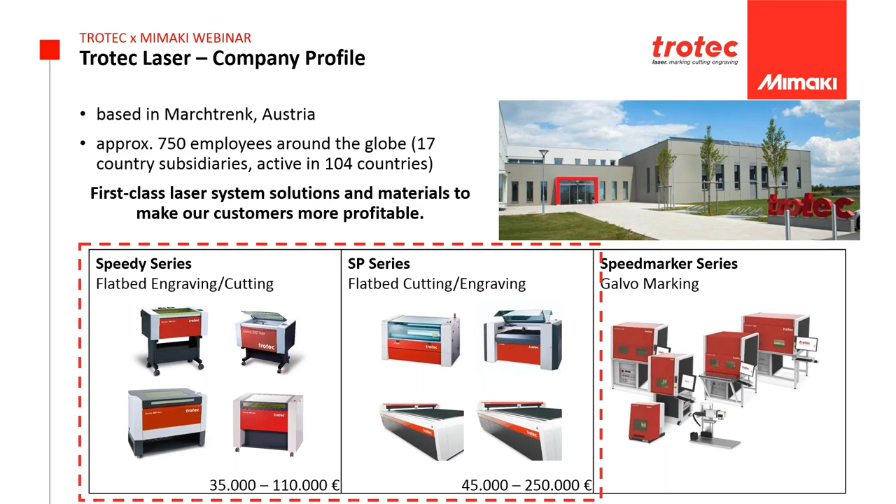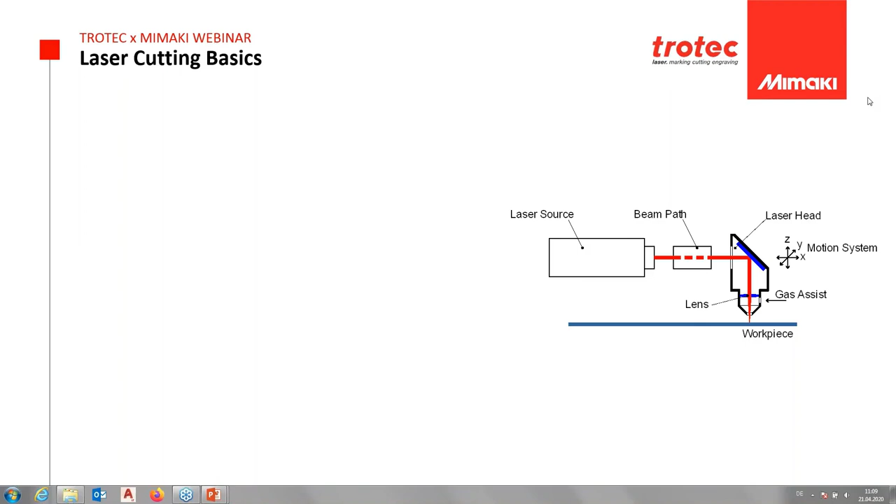What is laser cutting and how does this work? I want to give you a short introduction. It all begins with a laser source. This laser source generates a laser beam. We typically use infrared light, so the laser beam is not visible for the applications that we have in mind right now. The power range is about 30 to 400 watts, so we have a wide range of available power, depending on your material thickness and your productivity needs.

The beam path is a set of mirrors and lenses that delivers the laser beam to the cutting head. Then there's a motion system that moves the cutting head across the workpiece in X, Y, and Z direction. Then there's, of course, a lens that focuses the laser beam on the workpiece surface to make sure that you get really high energy density there. And at the workpiece, the laser beam energy lets the material sublimate. What does sublimate mean? It changes from the solid state immediately to gas state. So it's not melting, but it's immediately converted into gas.

What are the properties of laser cutting? It creates a very thin kerf. So the cutting gap, the tool, is very thin, in the order of 0.1 to 0.2 millimeters. It's contact free, so there's no force on the workpiece, and it directly converts from solid to gas. So if you extract the gas, you have a very clean process.

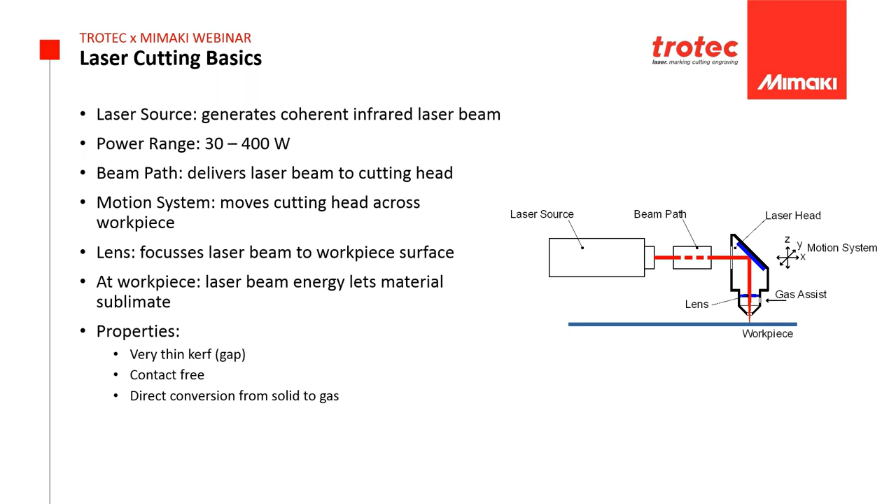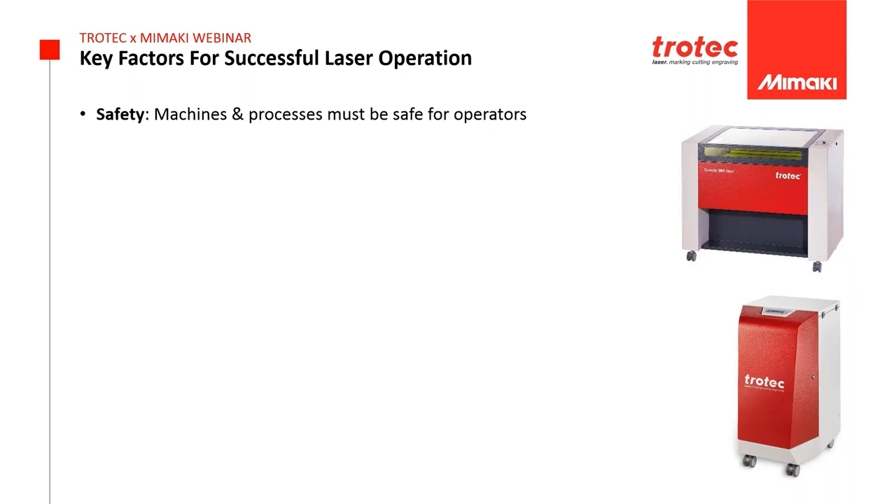There are some key success factors for laser operation. First of all, the machines have to be safe. This should be obvious, but the restrictions and guidance from both the EU and insurance companies is getting stricter, to make sure that the machines are safe and that the exhaust gas is treated properly. This makes a big difference between laser machine manufacturers, and we take a lot of care to make safe and clean machines.

The process technology: every process, every material needs its correct parameters. You have a few parameters like power, speed, or the addition of process gas, where you can influence the desired results. You can always do a trade-off between throughput and quality, depending on your actual needs for a certain workpiece.

The exhaust system is a key feature in a laser system. It's underestimated many times, but it's of high importance to have a reliable operation, and you have to make sure to have a good exhaust system in place. We do offer exhaust systems that complement all of our laser machines.

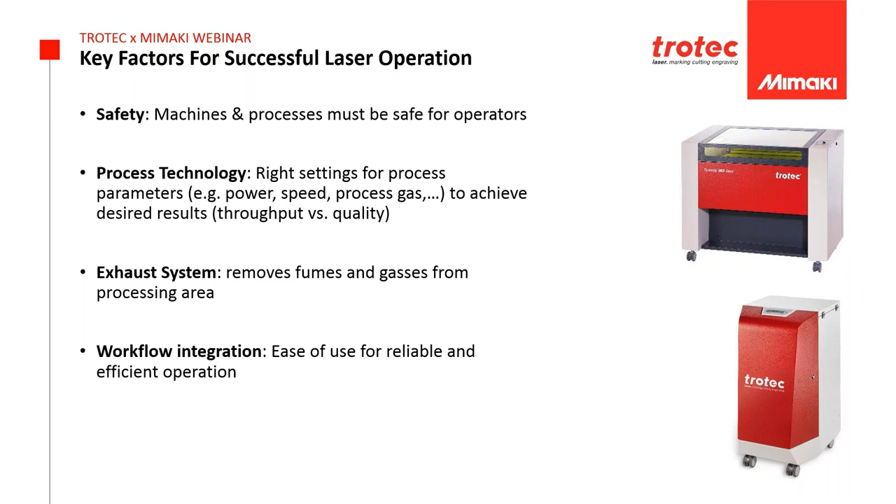Last but not least, it's important to have a simple workflow, to handle workflows easily, to follow through the steps of a workflow easily. I think the Mimaki Trotec integration is an excellent example of such an integration. You will see this later in this presentation, in this video, how this is integrated.

So with all that said, what are the benefits of laser cutting? Basically, it allows you to have more freedom in your designs and gives you more possibilities to design products. You start with your well-known possibilities of digital printing. You have graphics, colors, and lots of possibilities regarding your artwork.

Laser cutting, laser finishing adds the degree of freedom of shape, which means that you get out of your rectangle and have arbitrary shapes, and you can use structure, meaning that you can combine things, you can have different work materials, and you can structure your object, your workpiece in a more flexible way.

I'll address the two additional parameters right now. What does adding shapes mean? It lets you break out of rectangles and squares. The creativity regarding shapes is endless, and you can really create exceptional designs.

The integration of graphics and shape together gives you just so much more possibilities to tell the story and to provide convincing products. And it's fully digital, so as printing is, you can both create the print and shapes in a completely personalized way.

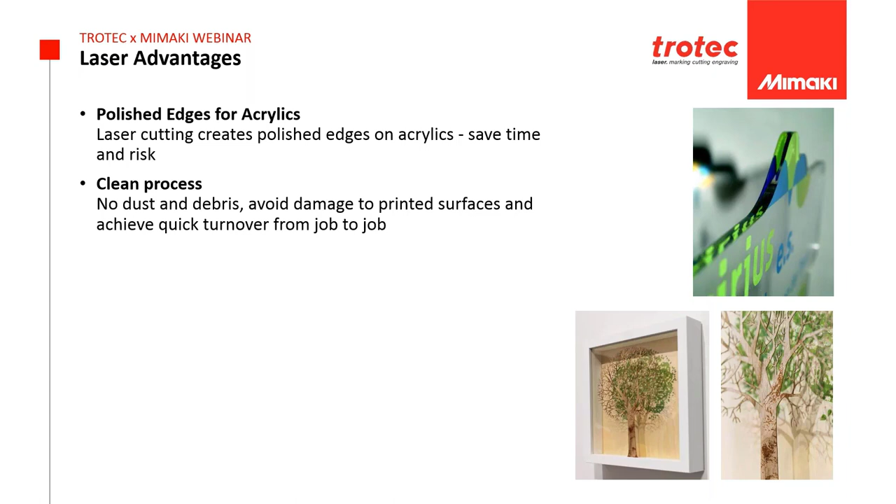It's a clean process, so there's no dust and debris. Your printed surfaces are not damaged by scratches, and you can quickly turn over from job to job because you don't have to clean the machine in a painstaking way.

You can create very fine details, very sharp corners, small structures. We have this tree example here shown, so very, very delicate structures are possible, and the shapes are not limited by your production technology.

And the fourth advantage, it is gentle to your print. If you cut printed objects, there's no stress on the print, there's no vibration of the workpiece because it's contactless, and so your print remains clean and is not destroyed.

The question of materials, is it universally applicable? It's applicable for a wide range of materials. Acrylics is a very prominent material for print and cut applications. Other plastic materials such as ABS, polyethylene, polypropylene, twin wall or hexagon graphic sheet for signage applications, all kinds of foil materials, self-adhesive, are well suited. Wood-based material such as MDF, plywood, veneer, or solid wood, as we will see in our example later on. Wood fiber-based graphics boards, something that's very eco-friendly, recyclable, and hard to process with other cutting technologies.

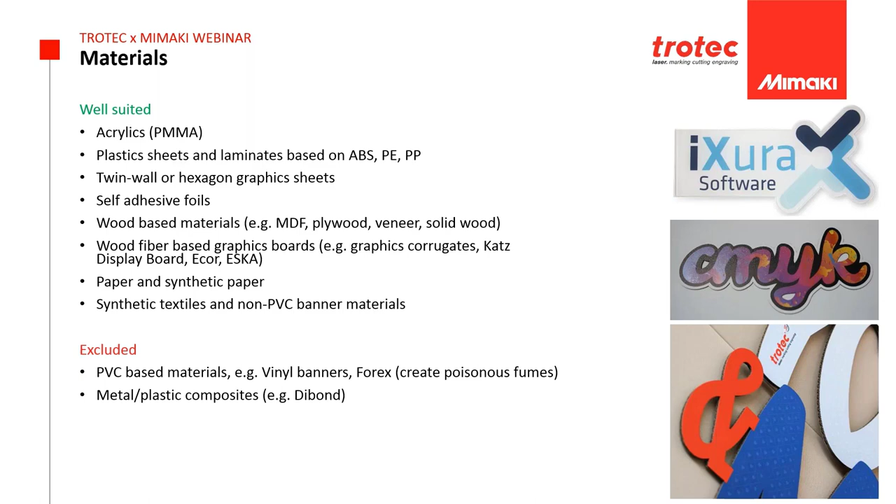There are different brands out there, they give excellent results with laser cutting. Paper and synthetic paper is also an option, and synthetic textiles and non-PVC banner materials. Speaking of non-PVC, excluded materials are PVC-based materials because they create poisonous fumes. Unfortunately, that's not possible to cut with a laser. And metal plastic composites such as dibond, they cause headaches as well.

So which product from Mimaki and Trotec would you combine? The first combination we would like to highlight is the Mimaki UJF 7151 Plus with the Trotec Speedy 360.

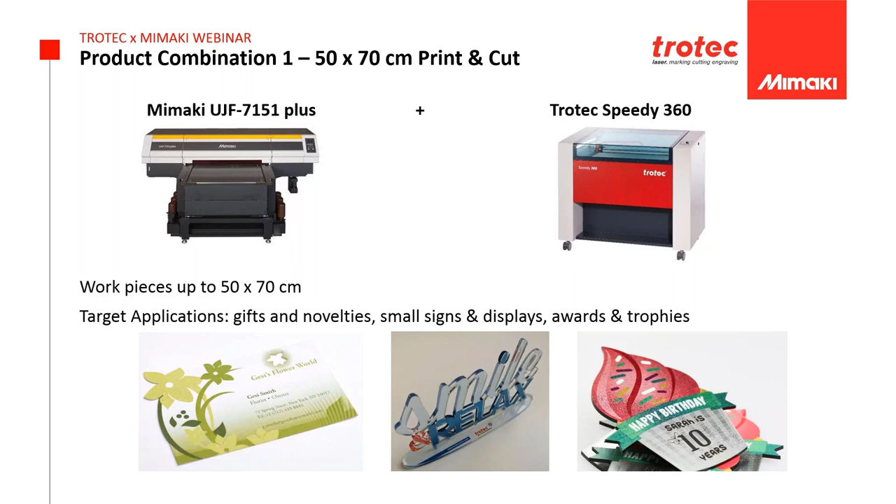This is also demonstrated in the video afterwards. It gives you the possibility to work on workpieces up to 50 by 70 centimeters. Typical target applications are gifts and novelties, small signs and displays, awards and trophies. Sample images are shown below. This is really a nice combination, you will see it in action later in the video.

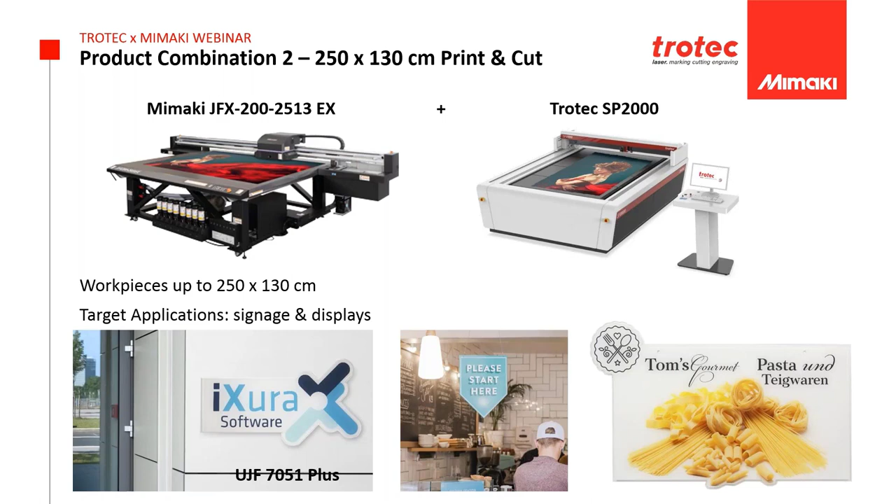If you need larger workpieces up to 250 by 130 centimeters, you can use the Mimaki JFX 200 2513 together with the Trotec SP 2000. The workpiece size is then 250 by 130 centimeters. Typical applications are indoor and outdoor signs and displays of attractive sizes already.

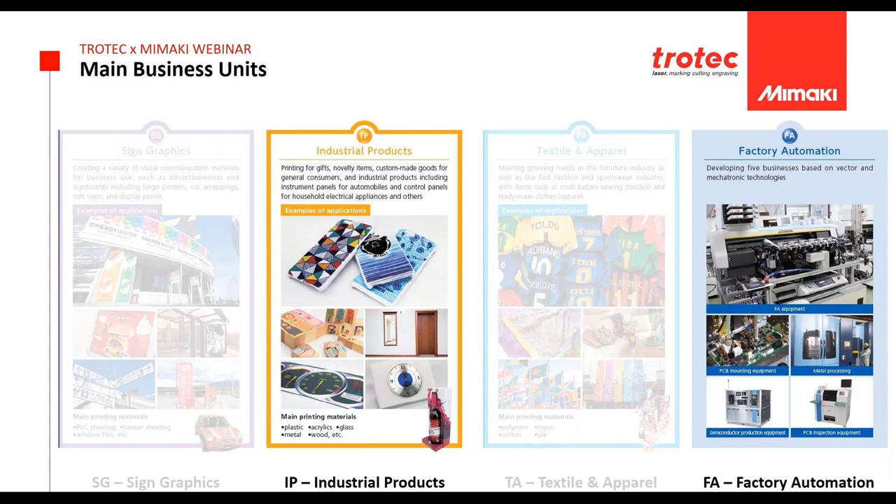For this webinar, I want to focus on the industrial products with the flatbed printers and workflow where this connects with factory automation. So let's have a look at our printers first, our lineup.

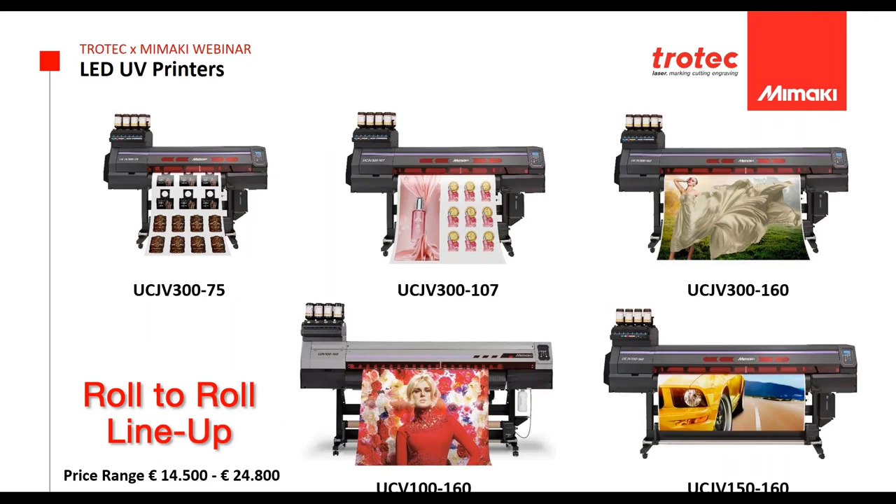First I want to show you the roll-to-roll. This is all LED UV printing. We have different sizes, different possibilities, cutting integrated or just printing without cutting, where you combine with Trotec. The price range here is just below 15 up to just below 25,000, depending on the size and speed. Each machine also has its different options.

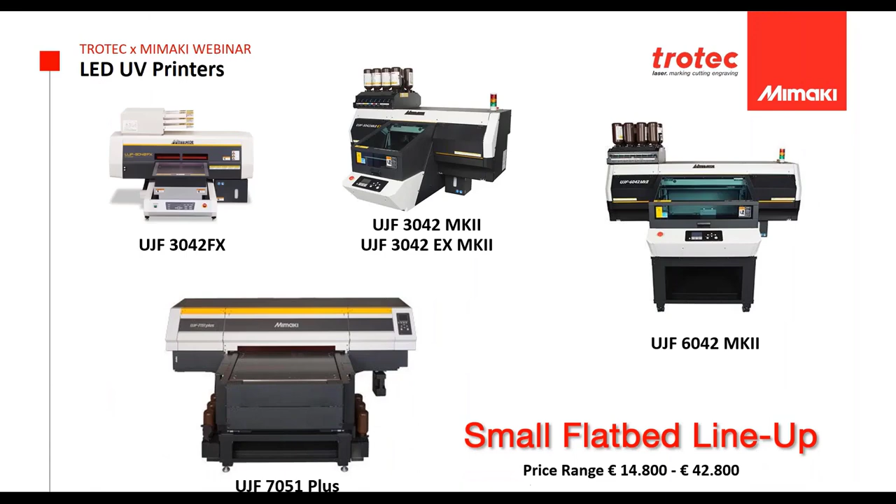The next one is the LED UV flatbed, the small lineup. We have our UJF 3042, where 3042 stands for the table size, so 30 by 42 centimeters. Then we have the following up from the FX, which is much faster - it's the MK2 version, and even the EX model, where we added an extra head for more productivity. Then we have an A2 size model, the 6042, 60 by 42 centimeters.

And the last one, as Michael also showed, the 7051 Plus. This is our most industrial product in this price range, with the highest quality and productivity in the market today, even with a silver metallic ink as the only one in the market. The price range is just below 15,000 to start with the FX, up to just below 43,000 for the 7051 Plus.

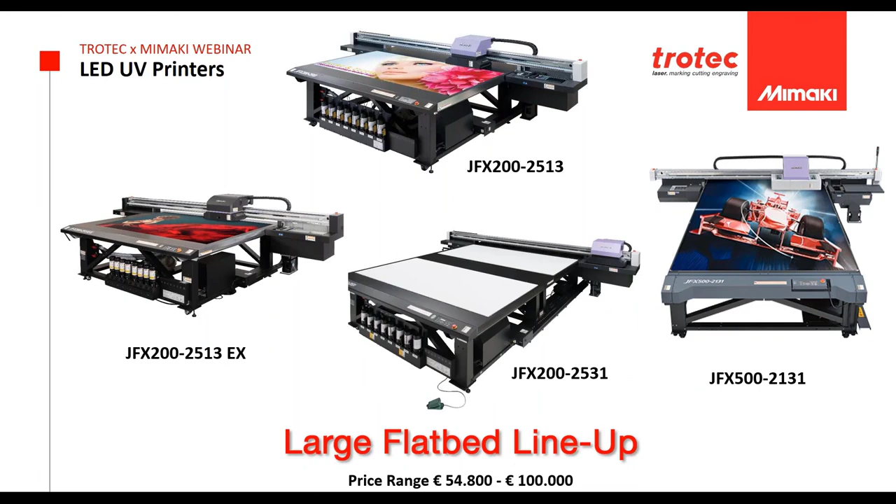The last one is the large flatbed lineup. We have 4 models. As Mimaki, we were the first to introduce LED UV light in flatbed printing, and we started with the JFX series. Now when you look at the lineup from left to right, we have...

...the 2513EX, our JFX 200 model, the latest model. Then we have the JFX 200 2513, where 2 meter 50 by 130 is the size. We have the 2531, with an extended table, where you can do production like a ping pong table - first the first half, then you switch and prepare the next part. That is 2 meter 50 by 3 meter 10. And the last one is our JFX 500, 210 by 310.

When we look at the price range here, it's just below 55,000 up to 100,000 euro. Nowadays, with this whole situation and these virtual weeks we are organizing, already for the 5th week in a row, I believe, we have some special pricing for you for basically all our printers. So if you are interested, please check out our website or contact your local Mimaki dealer.

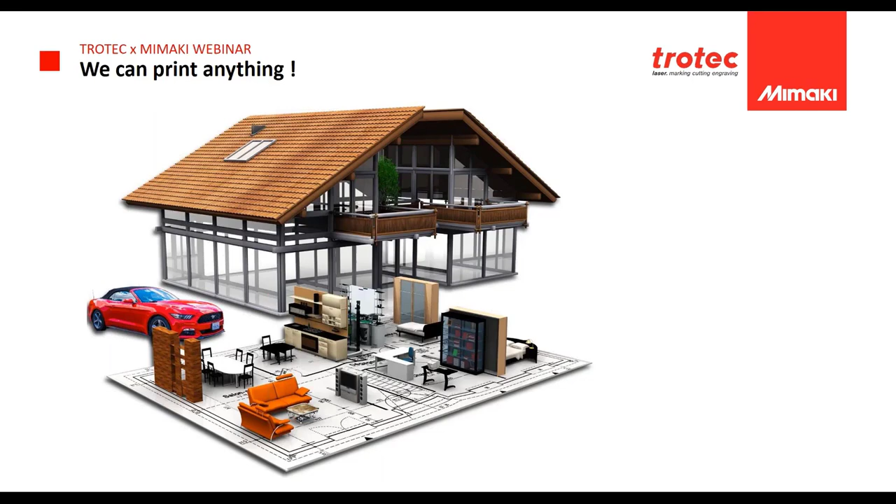So at the end, I want to come to the conclusion that with LED UV printing, basically we can print on anything. When it's flat and rigid, we can print on it. All the examples that Michael showed you what to cut, we can also print on. So if you look around, this is an example of a house, you see so many products that can be or are printed with LED UV technology.

From a dashboard, from your car, to cornflakes packaging, textile even - we can print textile, and Trotec also has a textile cutting machine. You see the table where we have wooden printing, circuit boards. So all around you, you see examples of what can be printed with LED UV.

So it's a big opportunity to have both of these machines in your company, and it gives you a lot of opportunity to print whatever you want or whatever is passing by.

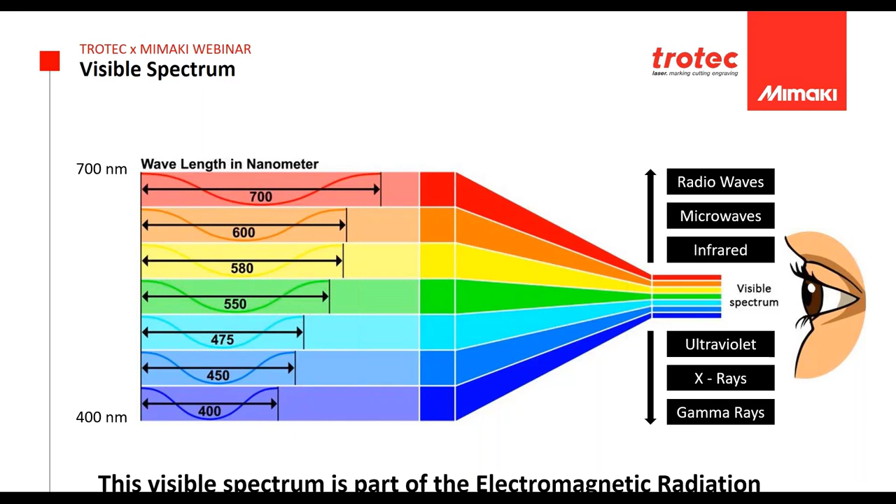To make it a little more clear, in the middle we have the visible light I was talking about, then on the right side you have the ultraviolet light - this is what we use to cure our inks with our printing technology. On the other side we have infrared, and this is the light that laser is using - Trotec is using infrared technology in their systems.

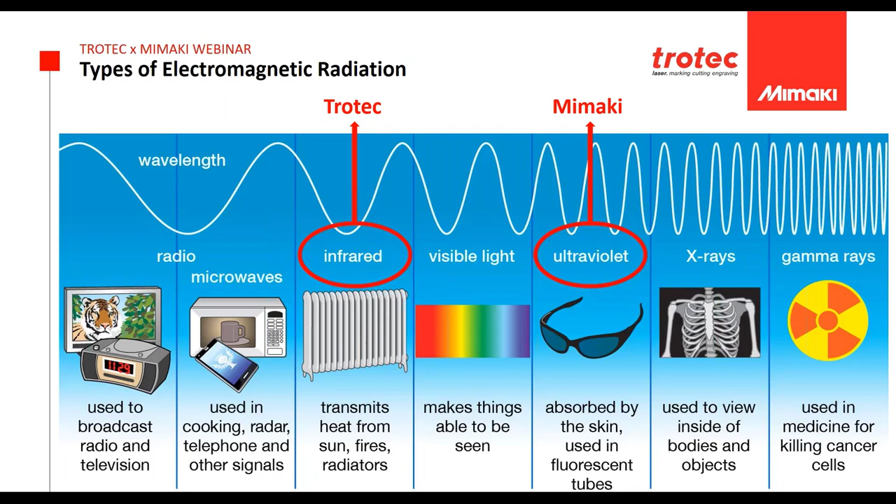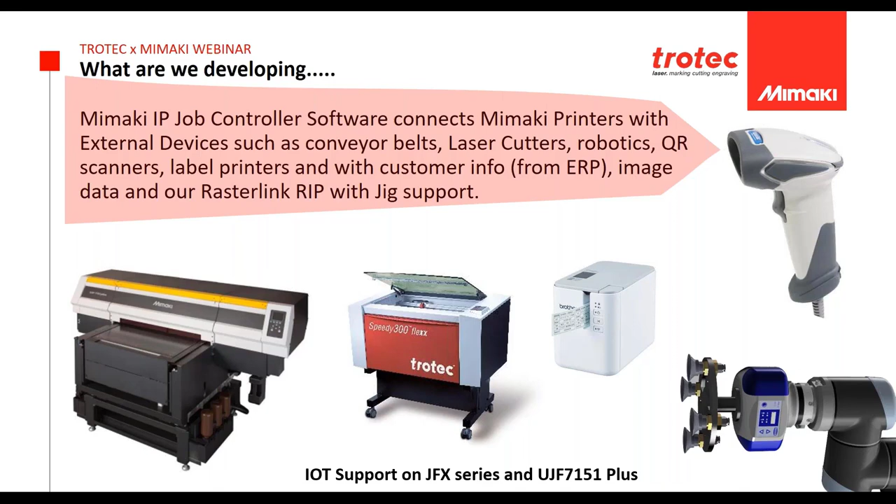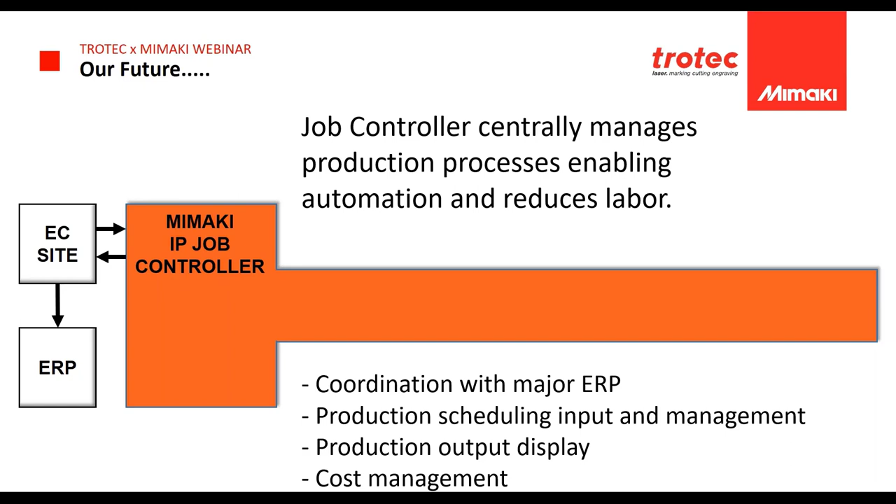Everybody is looking more and more to workflow solutions now. Let me explain a little how this looks. I made an example from an e-commerce site, a web shop, already linked with the ERP software of the customer. Then we have Mimaki IP Job Controller, which manages all the production processes. It makes things easier, fewer errors occur, and it reduces labor.

So how does it exactly work? The moment a job comes in, it will control the pre-process - for example, laser cutting to prepare the acrylic products that need to be printed. Next, the job goes to RasterLink, our RIP, which processes the image for the printer. Then we have the phase where the product is actually printed, and then it goes to post-processing again - that can be laser, coating, lamination, whatever is needed.

If it is done by a machine, we can connect that also with our job controller. Then, for example, a transport robot will move it from the machine to the next division. Let's say that could be quality control, where you can do a visual control or even use a camera to control the quality that has been printed. If the quality is not high enough, it can go back into the process.

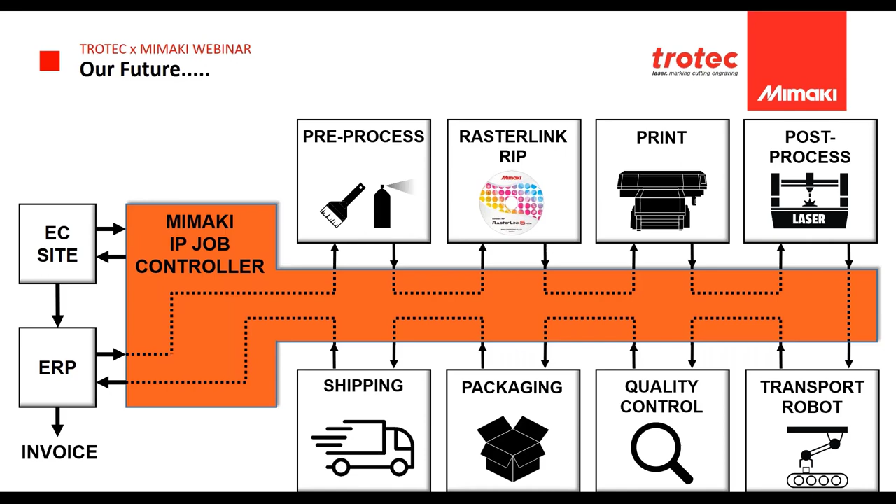If it is okay, you can do the packaging where you have a label printer. It will print the packing slip, and at the end it will be shipped, and most important, it comes back to the ERP system where an invoice can be generated. So this is basically what we are working on and how Mimaki sees the future of workflow processes, combining not only Mimaki machines but also all the other machines around the workflow and around the production process. So that was a little bit my story.

I want to show you a movie that we made last week. It is presented by Pim de Vries, who is our application specialist here at Mimaki Europe. Basically you will see the design preparation, so how he's working in Illustrator. Then he is going to use the file in our RIP and start printing. And then after printing, we need to do the preparation for cutting lines and crop marks that can be detected by the Trotec laser machine. And then the cutting will be executed. So I will start this movie and then we will come back to you and start our Q&A session.

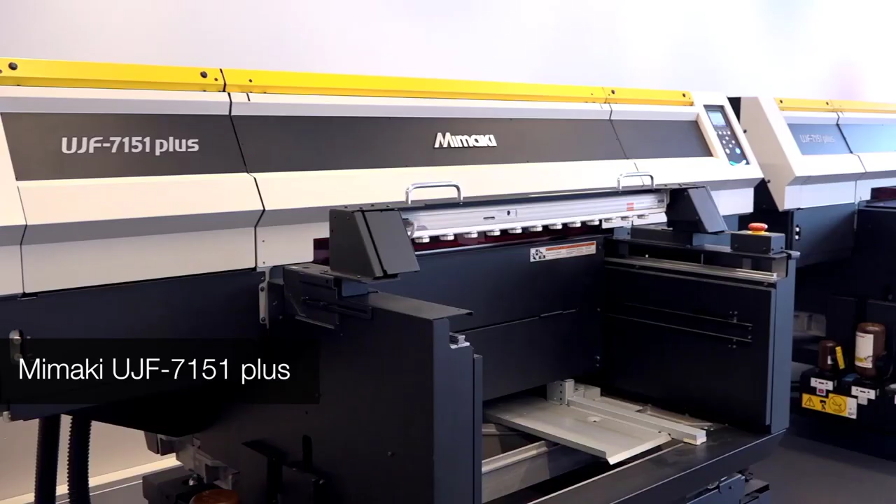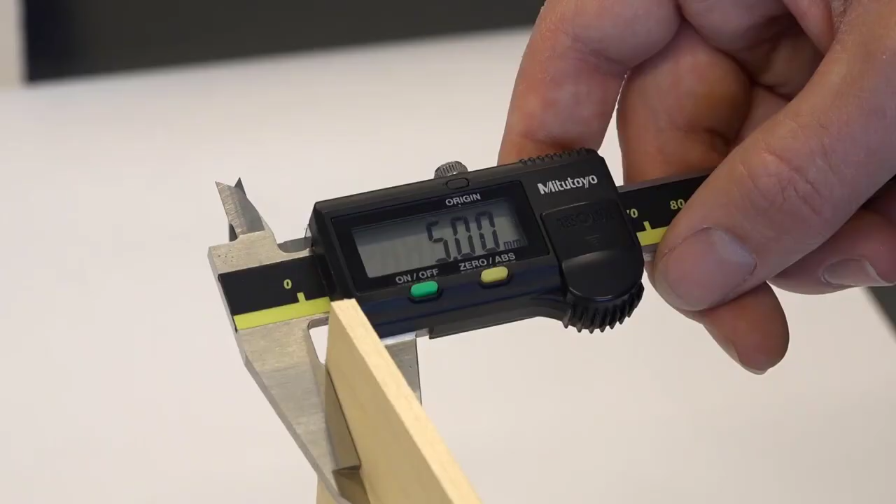Hello, my name is Pim, and today I'm going to show you how to create this world map sample using the Mimaki UJF 7151 Plus and the Trotec Speedy 360 Flex laser cutting machine. At first we're going to measure the material. The width is 60 centimeters and the height is 30 centimeters. The thickness of the material is 5 millimeters. For this we're using the Trotec wood. It's specially made by Trotec, so there are no hard knots inside, so it's perfect for laser cutting.

After you measure the material, you create a new document in Illustrator. You give it the exact same dimensions as you measured before. This is the artboard. First I designed the color layer. That's this one. Then I designed the white layer. So everything you see here is going to be printed white. On top of the color and white layer, we're printing a clear layer, as you can see here. And the cutting layer is the world map with the vision marks. You can see here that the black dots are also printed in the color layer.

When your file is ready, you can save it, each layer separately. So this is the color layer. Save the white layer. And the clear layer. And as a finishing touch, the cut layer. And then the printing files are done and we're going to RasterLink.

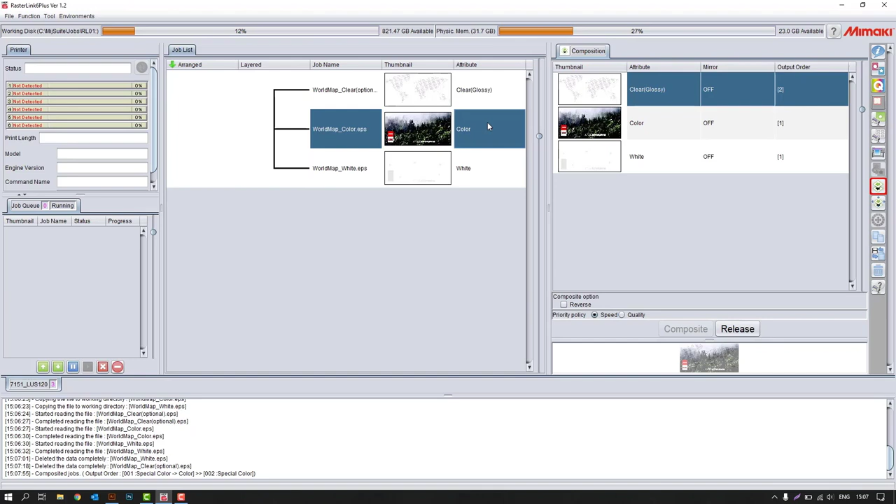In the info screen you can set up the clear to the UV mode glossy print, otherwise it's a bit matte. Now you have these 3 layers. We're going to select them all, and through the composition tab you're going to arrange them. So first we have white at the bottom, color in the middle, and on top we have the clear. In this way it's also going to be printed. Do a composite. And now it's set up as one printing job.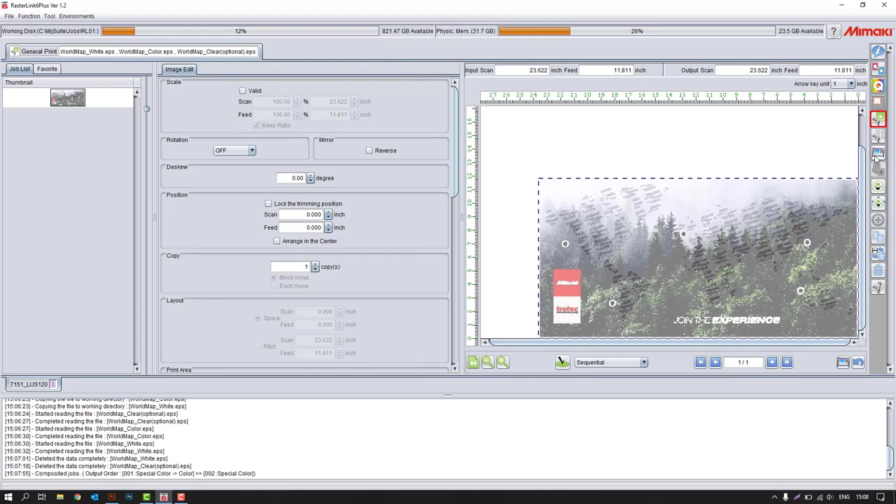Check your printing conditions with the right resolution and right profile. And when that's okay, then you can go to the general print screen. Make sure it's on the 0 point on the table, and then you can execute the job. Rip and print and start.

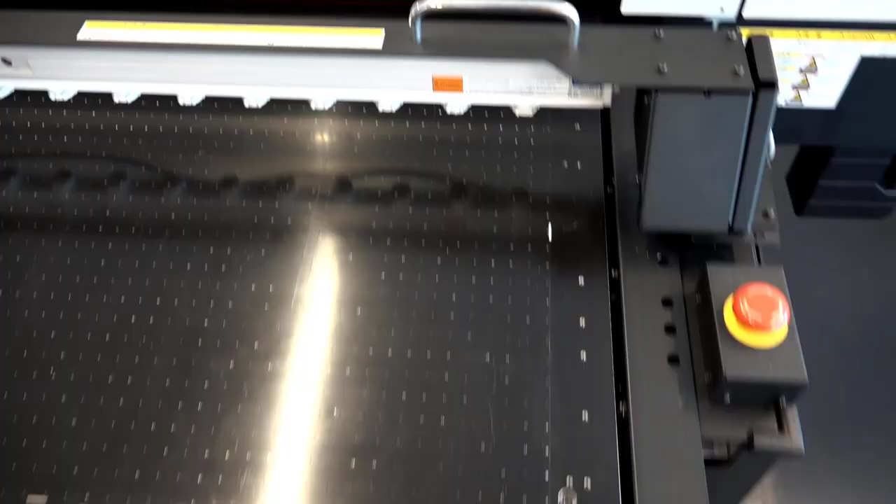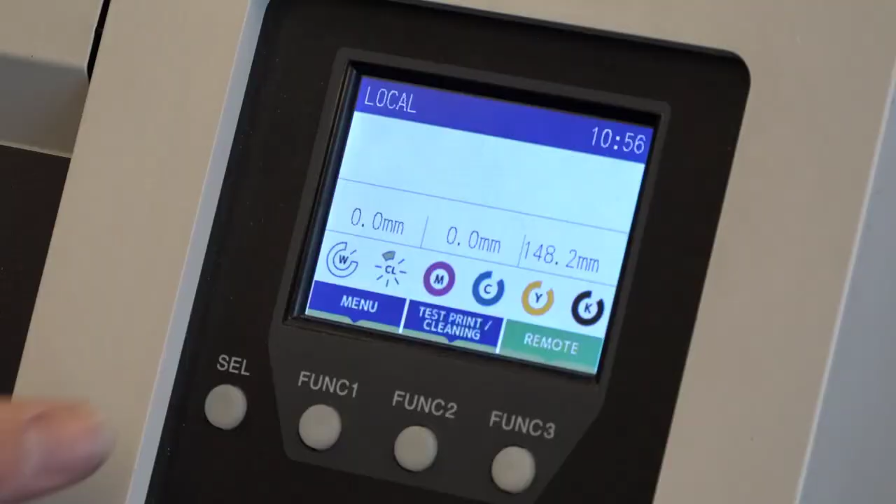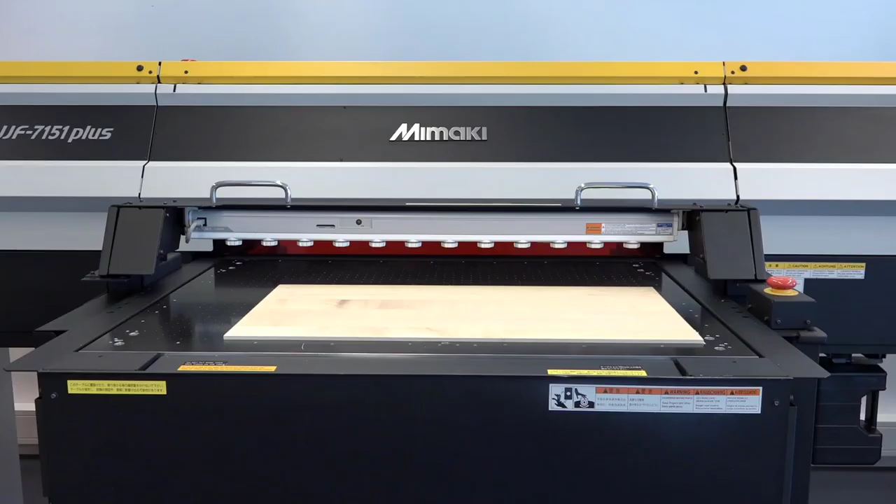For this application we are using the Mimaki UJF-7151 plus because the table size is the same size as a Trotec laser cutter. We place the wood on the 0 point of the table. The media thickness was 5 mm, so now we're going to set it up in the machine. Go to menu, select head height and set the media to 5 mm. And then select end to go back to the main screen. The height of the table is automatically adjusted to reach the 1.5 mm head gap between the print head and the material. Confirm by pressing remote. When you're finished setting up the print data, press print.

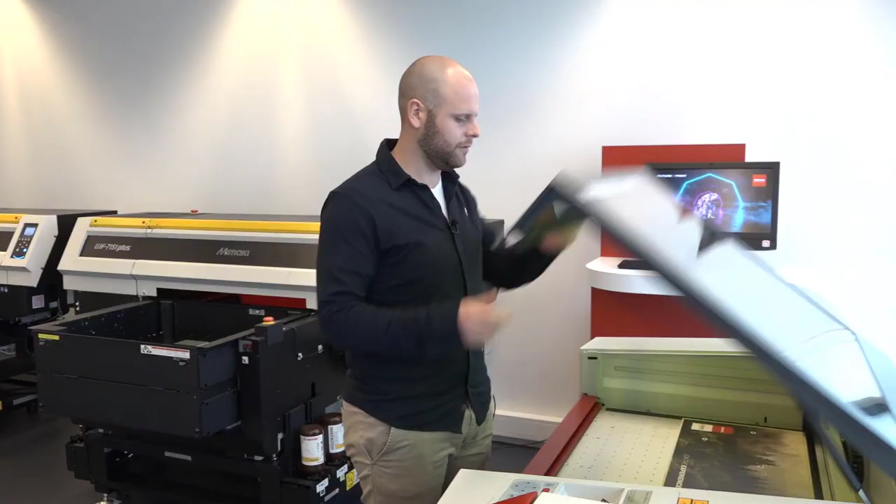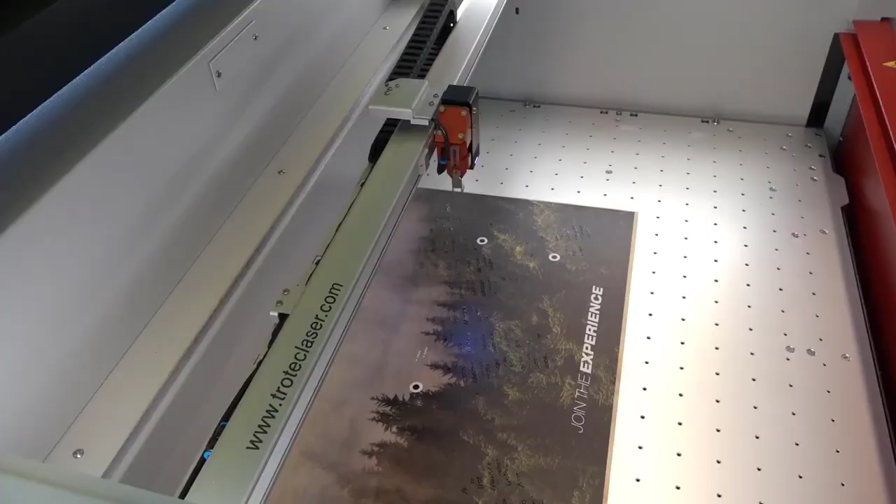So, as you can see, the printing is finished. Now we're gonna laser cut it with the Trotec machine, the Speedy 360 Flex. When you turn on the machine and close the lid, the table will go down to its lowest point. To set the focus of the laser, we're going to use this focus tool. Now you have reached the perfect focus point of the laser on the material.

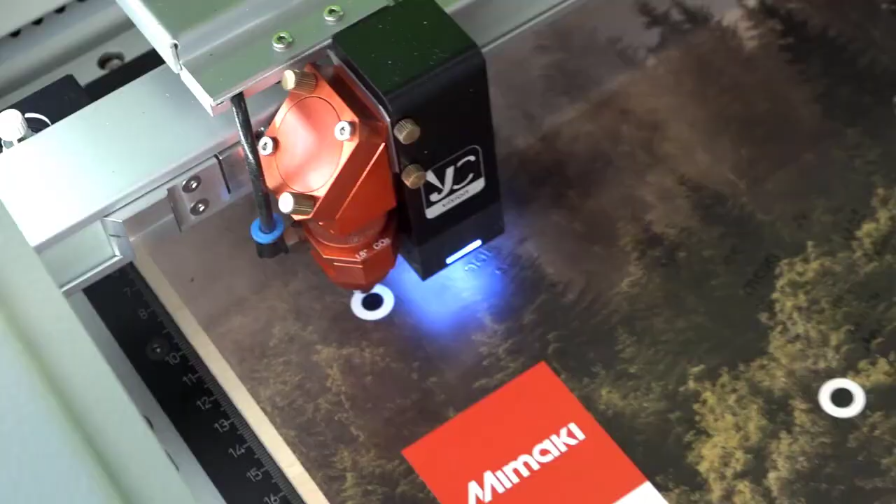Set the laser above the vision marks so the laser cutter knows where to cut. Okay, when the job is printed, you go back to Illustrator and open the cutting file. Okay, here it is. Select the cutting lines to check if they are all 0.01 point and a full RGB red.

The vision marks, the fill should be all black RGB and the line also black RGB with a line of 0.01 point. When that's all correct, just select it and send it to the printer. Print. Make sure the printer Trotec engraver is selected because this is your job control software.

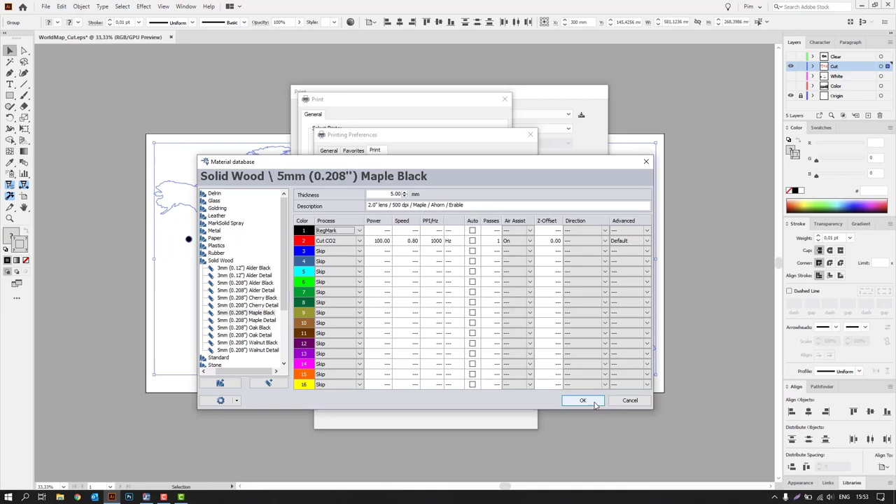Go to setup, go to preferences, and there you can see your media size. Here the material settings, set it to solid wood. Here you can see the solid wood, the 5 mm maple we used. Make sure the red is set to cut and the black is set to register mark, because the red line is cutting line and the black objects are divisions. Okay. And print. Again print, and job control will open automatically.

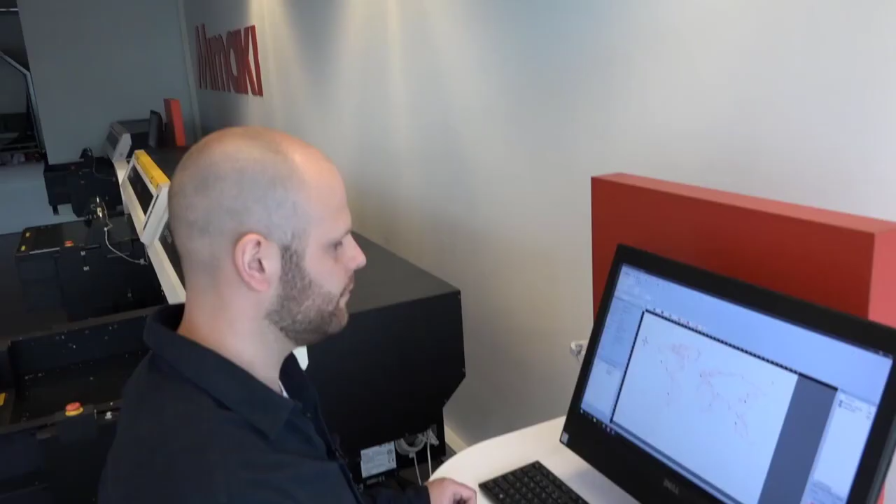On the right hand you can see your job and drag it into your working area, drag it to the 0 point, and the laser will automatically recognize the black dots, divisions for the camera. The settings were all done in Illustrator. You can see solid wood, 5 mm maple black. The thickness of the material is 5 millimeters, and your laser cutting settings are also at the top. And then press start.

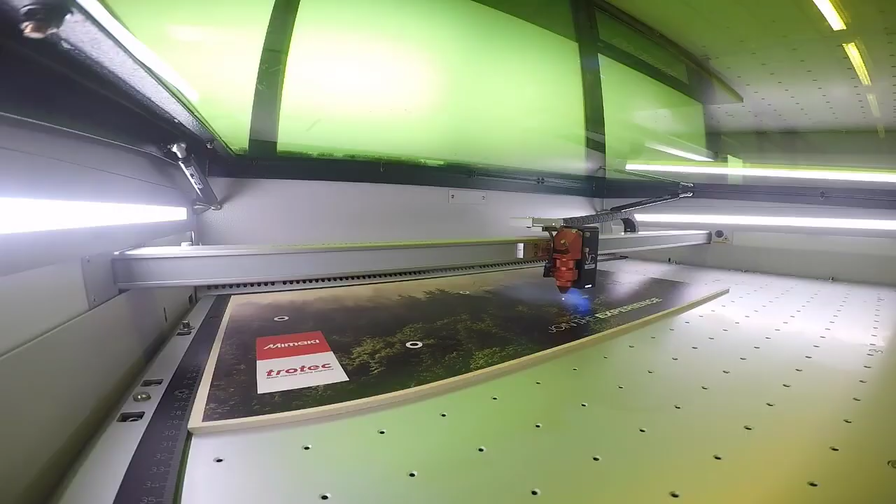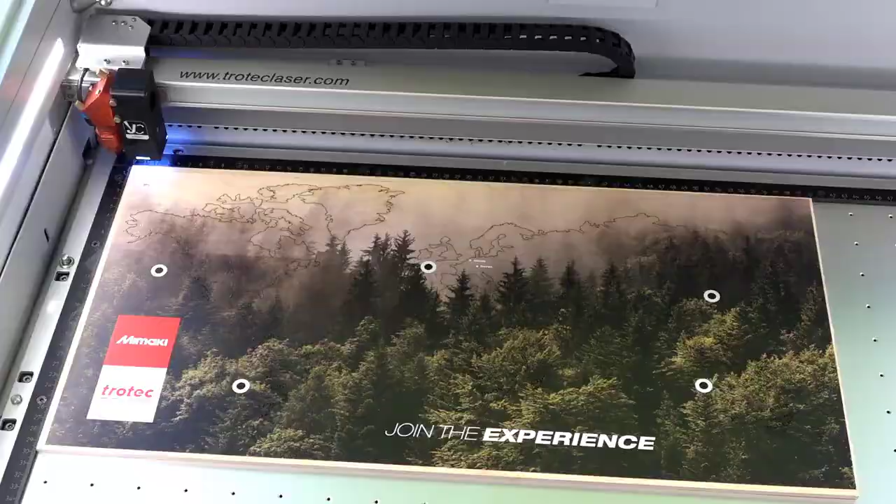When the cutting is finished, you will hear a beep, and then it's safe to open the lid. To prevent small parts falling out of the wood, secure them with a piece of tape. I put some double-sided tape on the back, so then we can hang it on the wall. And this is the end result.